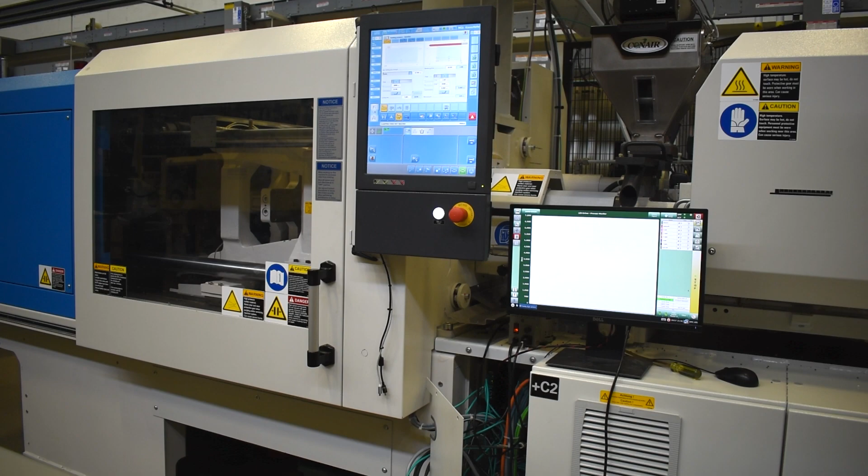Hello and welcome to the effect of D3 on pressure predictions using Moldflow, a senior project by Daniel Sterner and Sam Cranweiss. Our project focuses on a variable called D3, which stands for pressure-dependent viscosity in the Cross-Williams-Landel-Ferry viscosity equations. These equations are commonly used in plastics flow simulations to predict the pressures found in and required for plastics injection

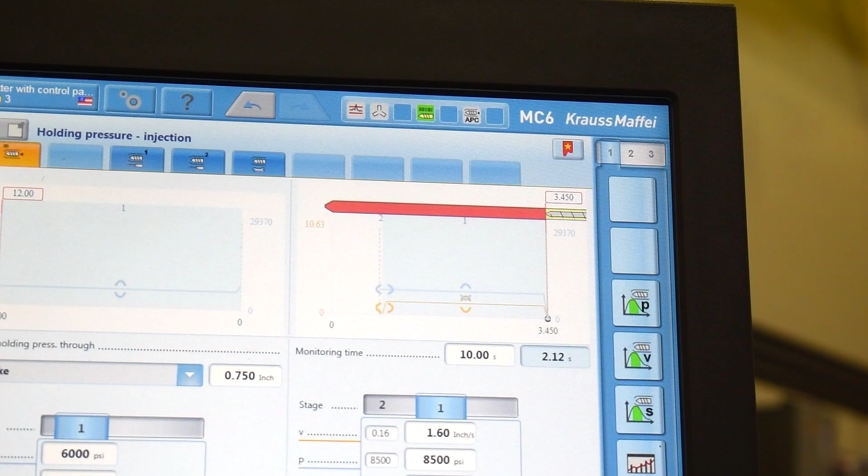molding. The goal of this project is to find if and when the inclusion of the D3 variable increases the accuracy of simulations. Currently, Autodesk has some guidelines on the situations in which D3 is expected to improve accuracy. These include flow length ratios greater than 100 to 1, wall thicknesses below 2 mm, and pressures in excess of 100 MPa.

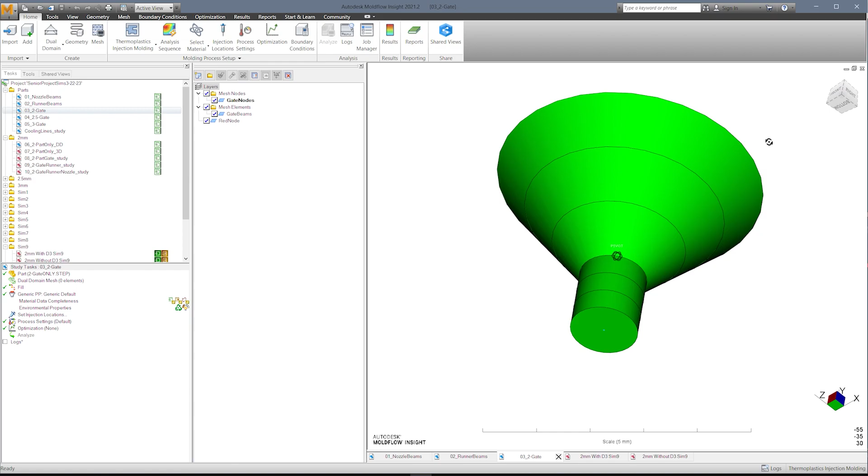In order to test when D3 produces more accurate simulations, a real-world process would be made to find the real pressure values, and a multitude of different Moldflow simulations would be created with the same process settings to test the predictions. The difference between these settings is the technique used to mesh the part, gate, runner, as well as nozzle geometry. 9 different simulations were created with combinations of beam geometry for the melt delivery system, a dual domain part, and 3D meshes for both the melt delivery system and the part.

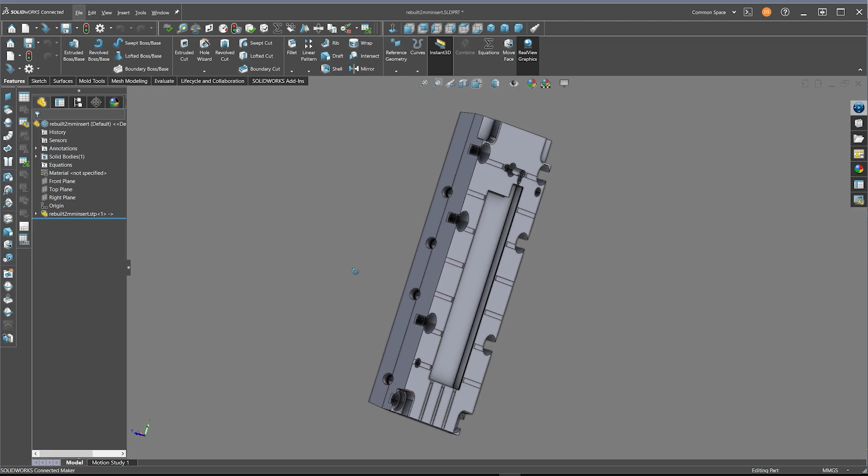3 different part thicknesses were tested to vary the pressures and flow length ratios of the part. To accomplish this, 3 mold inserts were designed for the real process to produce parts at 1, 2, and 3 mm thick. To see the highest effects of the variable, a material was selected with a high D3 value. The material also had to be processable in the lab and have characterizations available both with and without D3, as the variable cannot be added after the characterization.

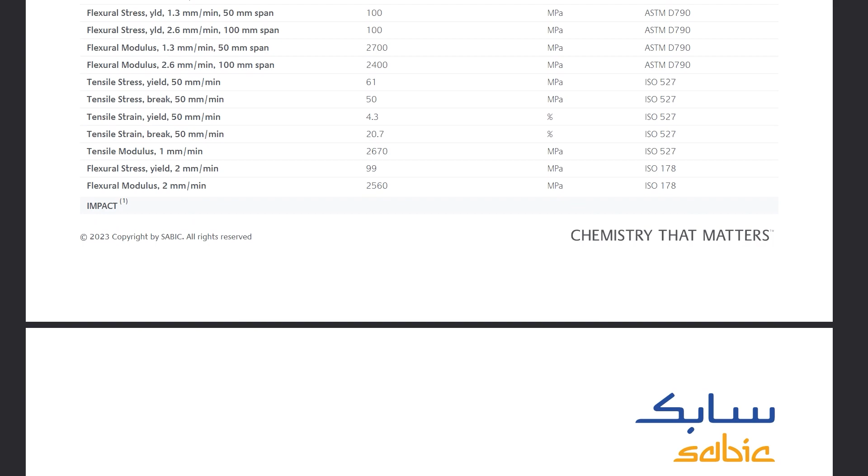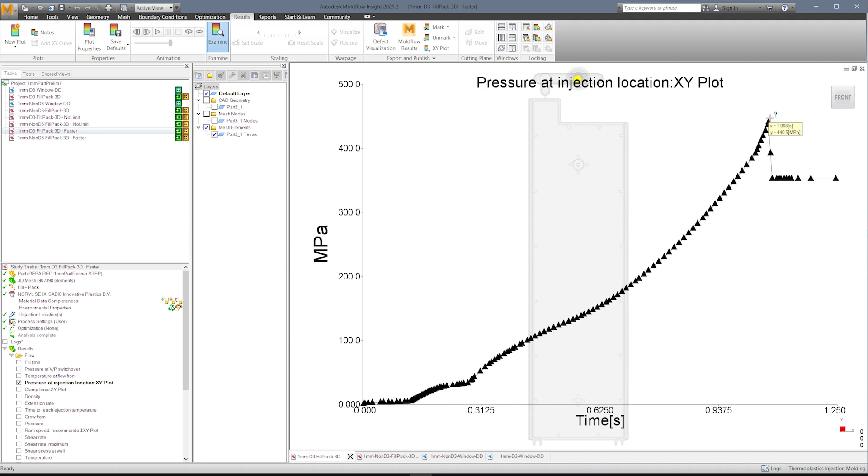The material selected for the project was Sabic Noryl SE1X, which is a blend of polyphenylene ether and polystyrene. A preliminary Moldflow simulation was made to establish a likely processing window for the real-world process, as there was very limited material available for this project. These simulations revealed that the pressures were expected to be very high for the testing, and as such, the planned mold insert to create 1 mm thick parts was exchanged for a 2.5 mm part insert.

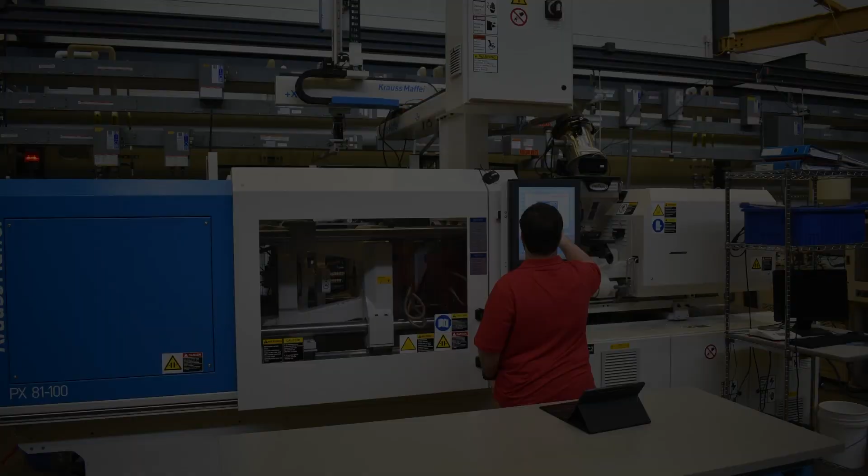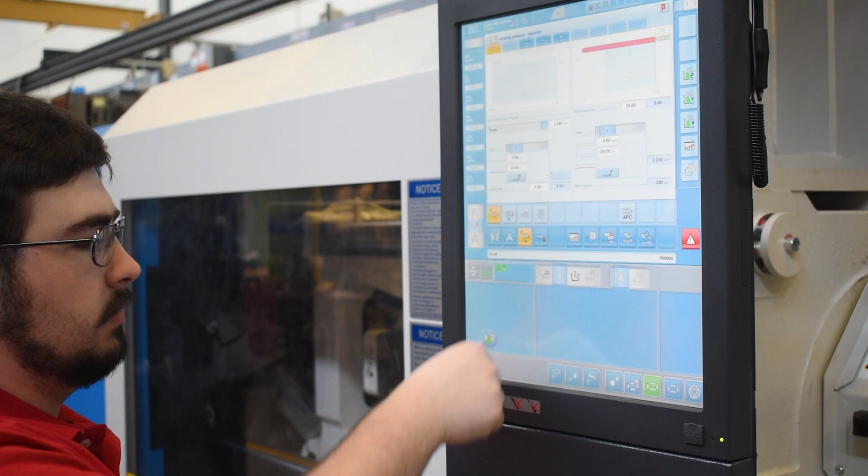Once mold inserts were machined, the real process was able to be established on our lab's KraussMaffei injection molding machine. This real process allowed us to collect the pressures found both in the cavity as well as behind the screw. Process settings were also collected to ensure that future Moldflow simulations would be as close as possible to this real process. The Moldflow simulations were set up with the different mesh techniques as well as with and without D3. The process settings were updated to match the real process as well. In total, 54 simulations were set up to test these different conditions.

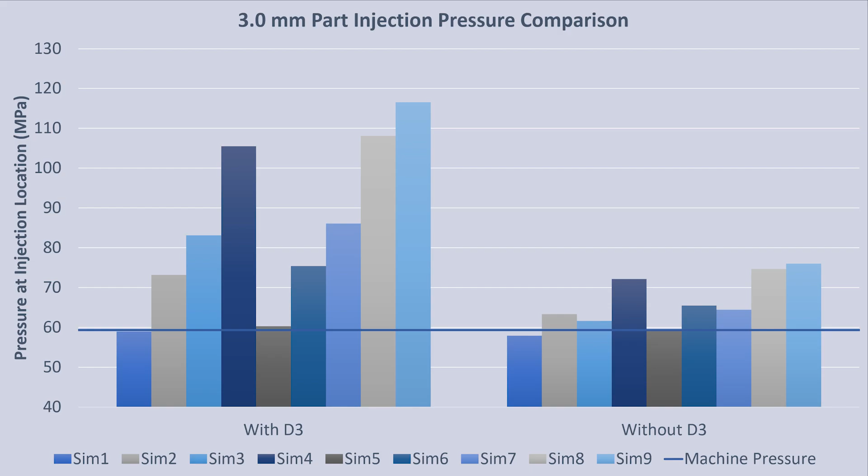Once the simulations were run, we found that D3 actually overpredicted in every simulation except the dual domain meshed parts. The simulations were significantly more accurate when D3 was not used. This was the case across all 3 part thicknesses. The consistently most accurate simulation used a beam runner and a 3D mesh for the part and gate. Similarly, the same simulation that included a beam nozzle was also quite accurate.

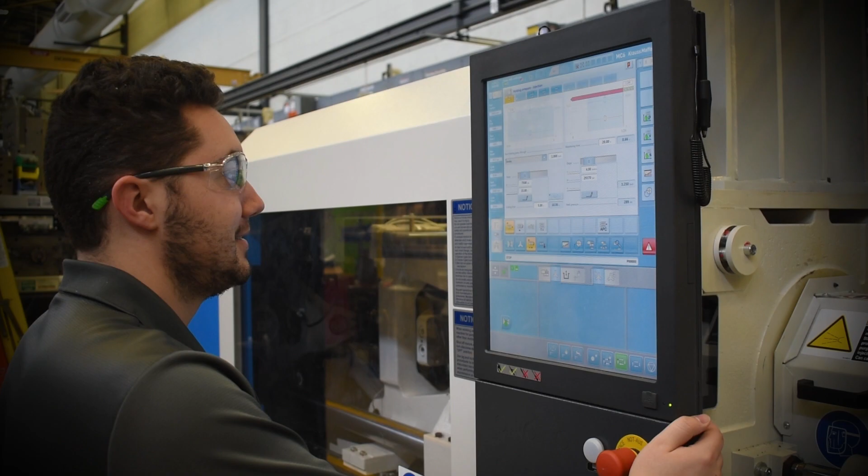For this project, the inclusion of D3 reduced the accuracy of simulations. However, we know that this is not always the case. It is possible that the pressures in the cavity needed to be higher to induce pressure-dependent viscosity on the real process. The characterization of D3 that was used in simulation also may not have been the best characterization, as it is not an exact science as to the best way to characterize the variable.